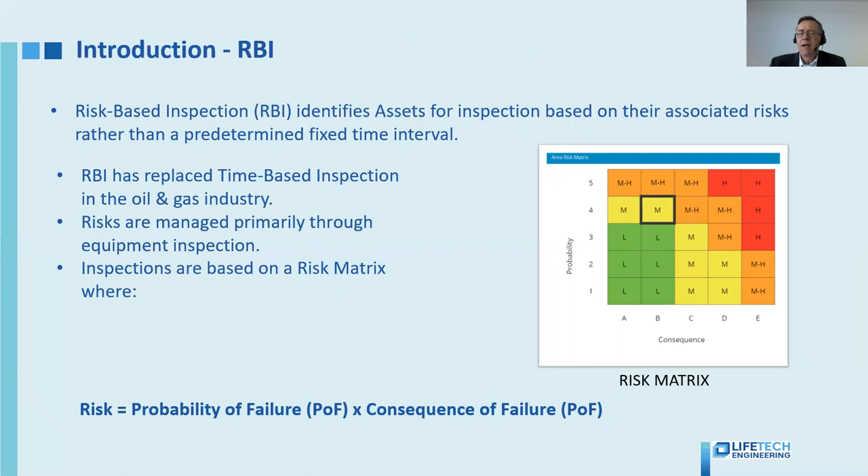Risk-based inspection identifies assets for inspection based on their associated risks rather than a predetermined inspection and maintenance interval. It's replaced time-based inspection in the oil and gas industry, and risks are managed primarily through inspection from a risk matrix, which gives a risk ranking for assets based on probability of failure and consequence of failure.

The UK HSE, the Health and Safety Executive Report, RR 509, described 4 stages of asset equipment life, and they all have their own characteristics and behaviour and have different management and inspection and maintenance strategies. The 4 stages are post-commissioning, risk-based maturity, deterministic, which is aging, and monitored, the final stage, the terminal stage.

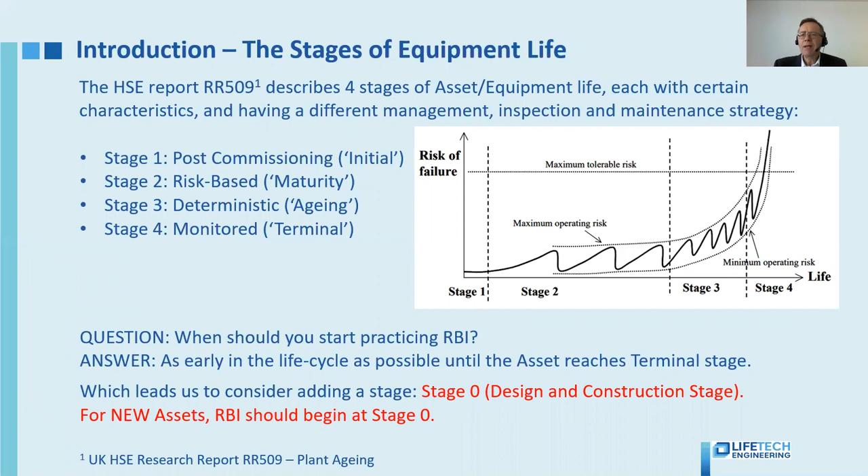And you would ask yourself, when should you start practicing RBI? Well, ideally as early as possible in the life cycle, and until you actually stop using the asset, until it reaches its terminal stage. So we would ask a question of, should you not consider stage 0, a stage before stage 1, and we're calling it the design and construction stage, and any new asset should start RBI at this stage. This is our opinion.

So what we have done on the stages of equipment life graph that you can see here is we've added a stage, a +1, which is stage 0. And this is the new project stage, where you should begin your RBI assessments at the design and construction stage, to get everything ready before you actually start operating. And then that's followed by the 4 stages I've already described: the post-commissioning, the risk-based maturity stage, then the aging stage, and the monitored, the terminal stage.

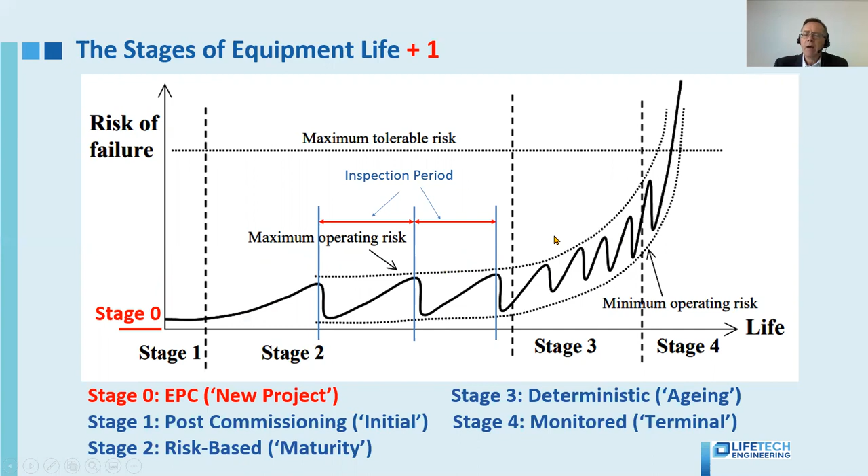And if you can see on the graph, when you're in stage 3, the periods between inspection become shorter as an asset ages. You can see the peaks on the sawtooth reducing because the RBI method is dictating that you should carry out inspections on a sooner and sooner basis because your assets need more attention.

Stage 0. If we consider stage 0, new project risk assessment, if you carry out an RBI assessment on new equipment while in the design stage, you can gain important information about how you're going to carry out RBI on an ongoing basis throughout your asset life cycle. It allows potential risks to be minimized and to have an RBI in place at the very start, at the very beginning of an asset's life. And you should follow the API 580 guidelines for this.

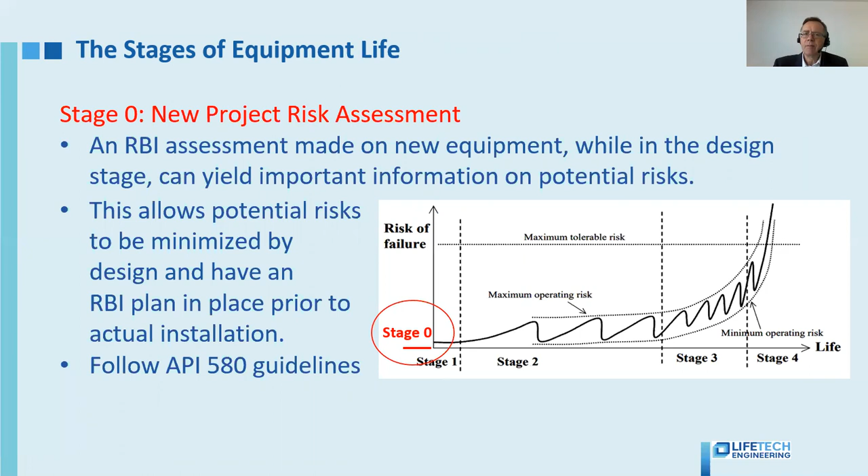Stage 1, the post-commissioning and early life stage. This is effectively a bedding in stage. You can see higher rates of damage accumulation and issues arising here because your equipment is actually settling into its operational life. And so your service conditions might reveal weaknesses or faults in design, or you might have fabricated some parts of it incorrectly.

For example, you might have a faulty welding procedure, or there might be some fabrication defects. And when it's bedding in, you might also find you've got installation stresses that you perhaps hadn't thought about, or you might have some mistakes in assembly. You might have some seals that don't fit, or some bolts fitted incorrectly. So stage 1 really is the early life, the bedding in stage.

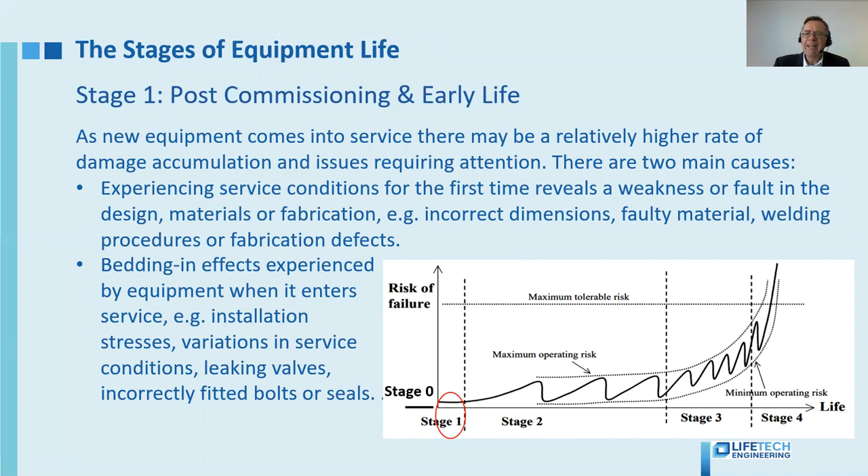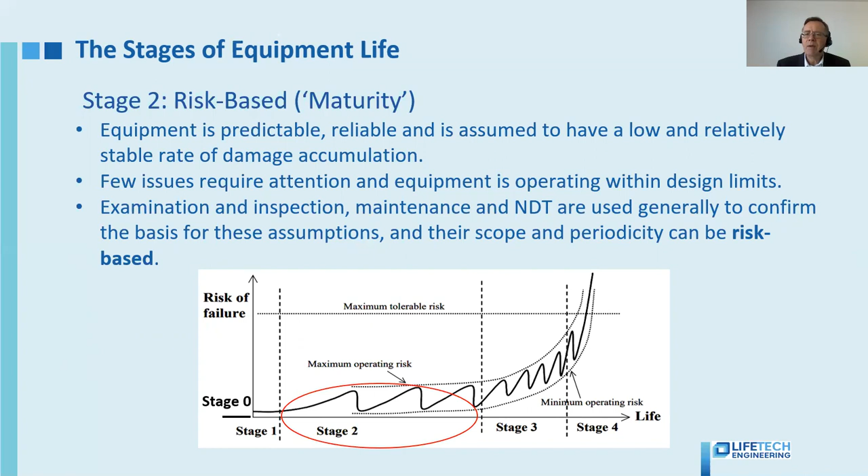Stage 2, risk-based, the maturity stage, is when your equipment is actually into its operational life. It's into its stride, and you should have low issue rate and stable rates of damage accumulation, because this is the actual good operational stage. You should experience few issues arising from equipment when it's operating within its design limits at this stage. Examinations, inspections, and non-destructive testing are usually performed to ensure that the equipment is actually operating as it should at this stage.

The aging stage is where your assets have been operating for a while, and you might expect some damage to accumulate, and there'll be a rate of degradation here. The equipment is older. It's showing some signs of damage and some signs of age. So it's important to determine the extent and rate of damage, and you might at this stage have to look at some fitness for service assessments.

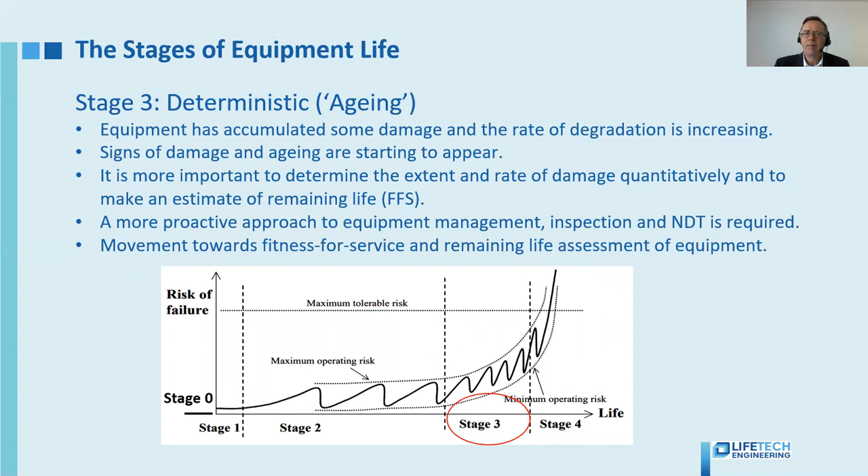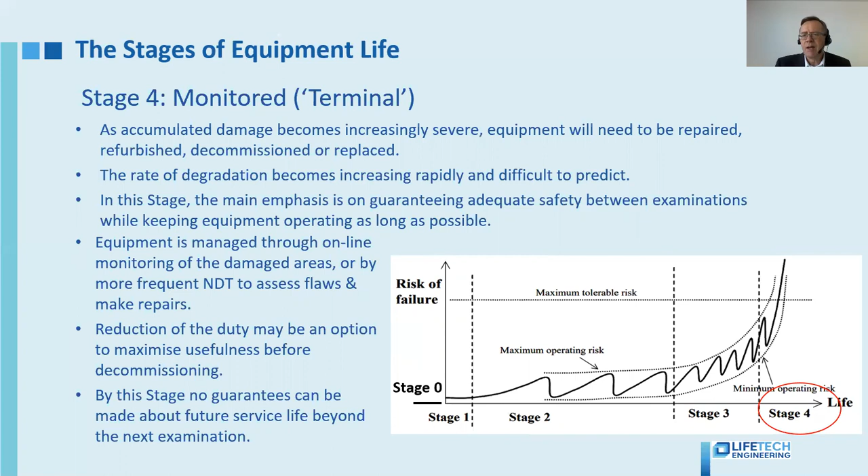Stage 4 is where it's ending. Your equipment is nearing the end of its life. Its accumulated damage is becoming increasingly severe, and equipment might need to be repaired, replaced, refurbished, or decommissioned. The rate of degradation is becoming increasingly more rapid. So the emphasis here is on maintaining your equipment safely and getting as much performance out of it as you can until it actually reaches the end of its life. At this stage, no guarantees can be made about the future service life beyond the next examination.

So to consider RBI at the end of life stage, it is useful, but the inspection efforts should really be focused directly on high risk areas where inspections will provide a reduction of risk for the remaining life of the plant. The high risk areas really only. Any areas that do not impact on risk for the remaining life, you shouldn't examine at this stage.

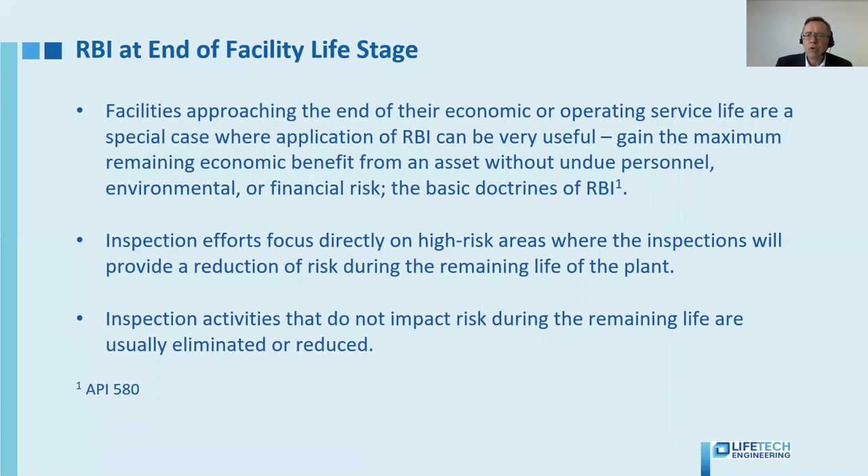So to summarize RBI at different stages of equipment life: stage 0, the design construction stage, assess equipment before it's installed. Look at any criticalities for the risk matrix for potential assessments. At stage 1, use RBI for the first inspection, following your operator standards and regulations to make sure that once it's commissioned, it's acting the way it should. And then stage 2 and stage 3 is where you have regular RBI, regular risk-based inspections through its real main core operational phase. And in stage 4, apply RBI at the end of life, but enhance it with fitness for service assessments.

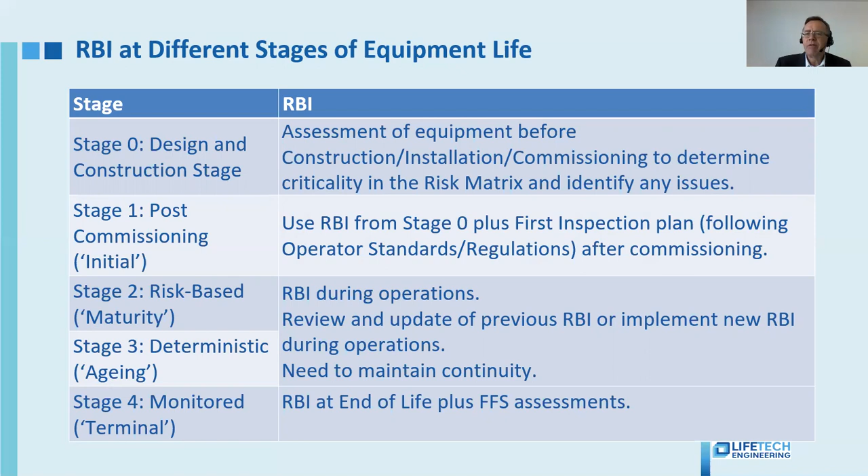So RBI for new projects versus RBI for established projects. For new projects, normally there's a time limitation here to apply RBI, because it's at the end of the EPC, it's at the end of the construction phase, and you have a restricted budget to look at RBI. You might have limited experience of RBI because you've got no data to work with. Most of the comments regarding RBI from the operator will come at the end of the construction phase, and so there's pressure to actually deliver the equipment into service.

Whereas for established projects, you have an established system which can be difficult to make changes with. There's customs and practices that have evolved over the life of the asset, and it can be difficult to move away from those. People can be busy with day-to-day operations. They'll have task overload perhaps. It's an additional task for plant engineers to address, and they have to integrate a lot of established procedures into the RBI system.

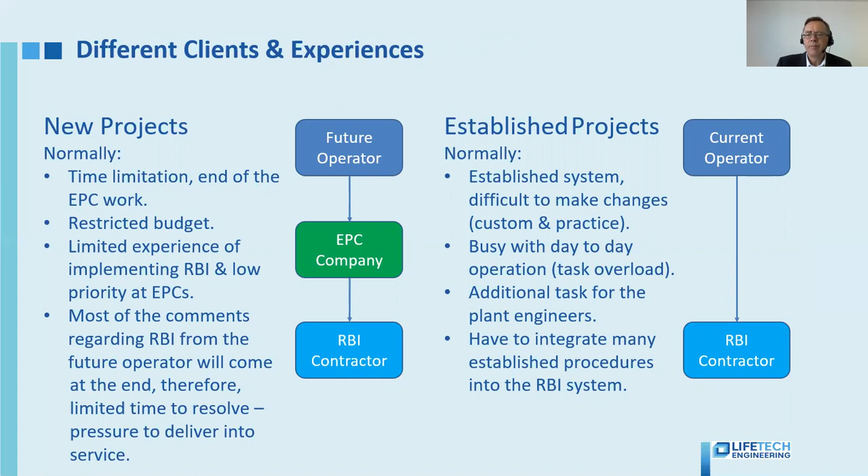Data quality and availability. For new projects, data should be readily available in electronic format. Drawings and data, however, can be updated during the RBI project. So you might have several different drawings to evaluate on an ongoing basis at the beginning. You might not have isometric drawings available, however, and you'll have no baseline data because you haven't commenced with RBI yet. So a lot of it is subjective.

With established projects, we found that you can have low quality drawings or missing drawings. You can have discrepancy between data from your line list, your P&IDs, and your inspection reports. A lot of the information will be in paper format. You may well not have everything in electronic format. So there's a degree of formalizing data before you can commence your RBI.

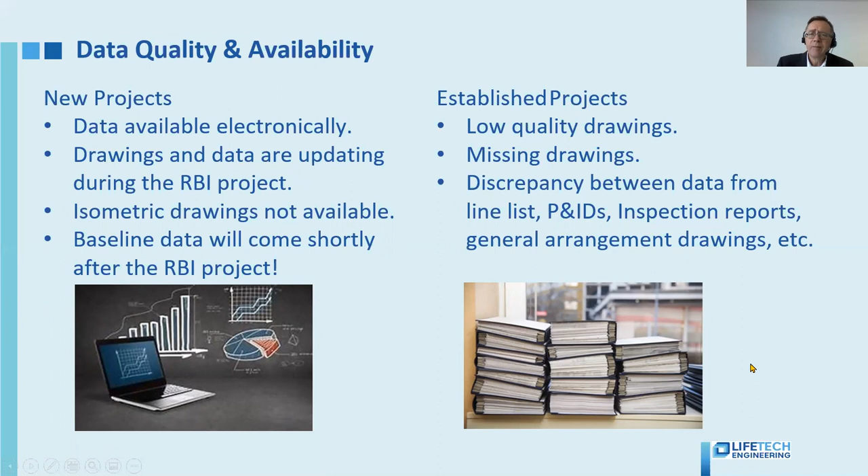Damage mechanism identification and degradation rates. For new projects, there's no real data available because you haven't started your first inspections. Therefore, you have to use theoretical models and make estimations on your corrosion rates. Theoretical models also have to be used to estimate cracking. However, it's essential to record all your assumptions made for future reference.

If you consider established projects, the client wants to address specific damage mechanisms. However, API 581 doesn't cover specific damage mechanisms. So you have to apply the principles in API 571 in addition. But you need to be aware that API 571 doesn't contain calculations for damage mechanisms. There will be different degradation rates and damage mechanisms present on different lines in a corrosion loop. So there's many aspects to consider for both new projects and established projects.

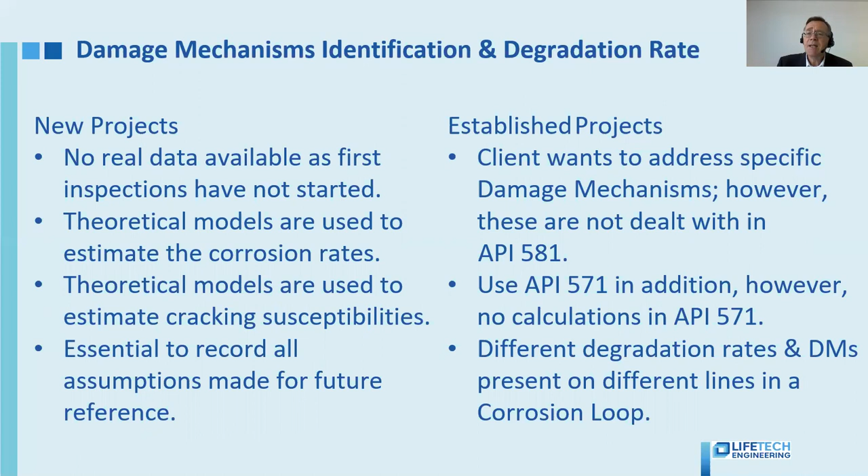Consider the risk matrix. For new projects, there might well be confusion between the project risk matrix, the risk matrix used when actually in the construction phase, and the RBI risk matrix for when you're actually looking at operational risk-based inspection. They're not the same.

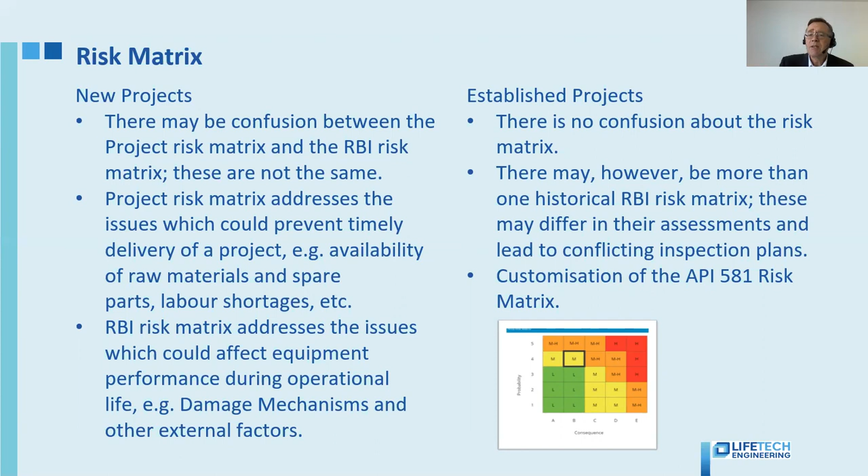For established projects, there is no confusion about the risk matrix. You know what it is, and you know what you're working to. It's a risk matrix for operational equipment assessment. However, there might be more than one risk-based inspection matrix because of historical occurrences. These can differ in their assessments and may lead to conflicting inspection plans. So you will probably have to customize a risk matrix to fit your established projects.

Inspection planning and first inspection. On new projects, you will need to combine RBI inspection plans with your first inspection, the normally time-based first inspection, and that can occur over a 2-year period. For established projects, it can be difficult to change historical inspection intervals built up from custom and practice over the years.

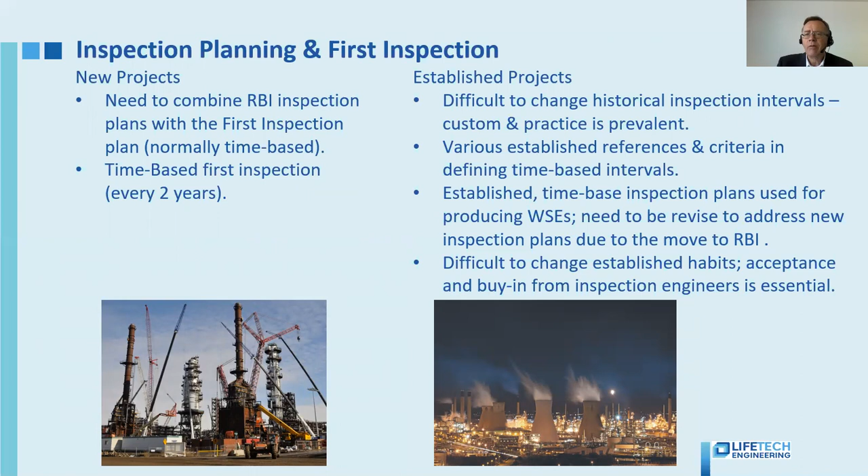Established time-based inspection plans used for written schemes of examination will need to be revised to address new inspection plans due to the move to risk-based inspection. It's always difficult to change established habits, so you really need to get the buy-in from senior management and all of the inspection engineers, the process engineers, everyone who's been involved in inspections and operation of the plant over time.

The RBI team. For a new project, corrosion engineers play a critical role because they need to identify, in their experience, the potential damage mechanisms that they might encounter and their potential effects, the corrosion rates on equipment. In contrast to this, the established projects rely on the inspection engineer, who plays a critical role in reviewing inspection histories and determining where to pay attention for future inspections.

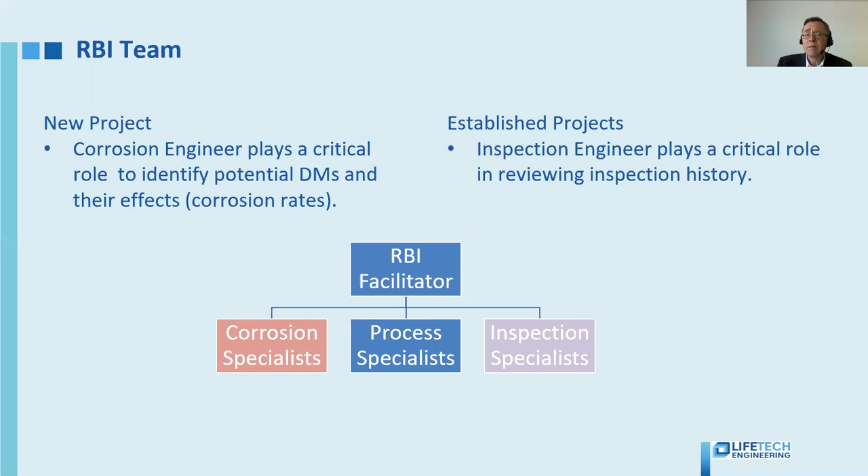Project durations. We find that for new projects, there are shorter projects due to readily available electronic format data, and you also haven't got any inspection reports generated because it's a new plant. It's a blank canvas. So data gathering can be easier and analysis can be easier, but there's a lot of subjective viewpoints here because it's a new plant.

Established projects can be longer because we find that there could be a lot of data unavailable. There might be a lack of data quality and inspection reports might be missing. So data gathering for the establishment of RBI on an established project can take longer.

Solutions. For a new project, we would recommend using a good RBI software with the ability to calculate theoretical degradation rates. Establish connections with future operators as well as the contractors to make sure that everyone has a rapport, that everyone knows the reasons for doing your RBI.

Consider time wasted for revision of any work due to new documents evolving. Once you've commenced assessment for RBI, there might be new drawings, there might be replacements of parts of the design. So you have to be careful that the current information you're using is the most up-to-date information that you will have, and that it's not liable to be replaced by alterations. Ensure that the first post-commissioning inspection requirements are considered in your RBI plans, and establish an experienced team, especially the corrosion engineer.

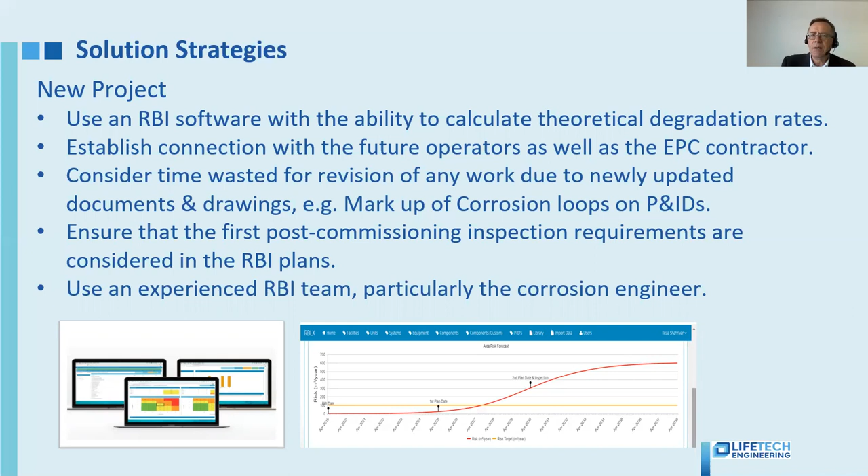Consider established projects. We have found that creating a joint team between contractor and client is the best way to go. Involve the inspectors, the corrosion engineers and process engineers from the start. Make data assumptions for low risk equipment to save time. Concentrate on the high risk areas.

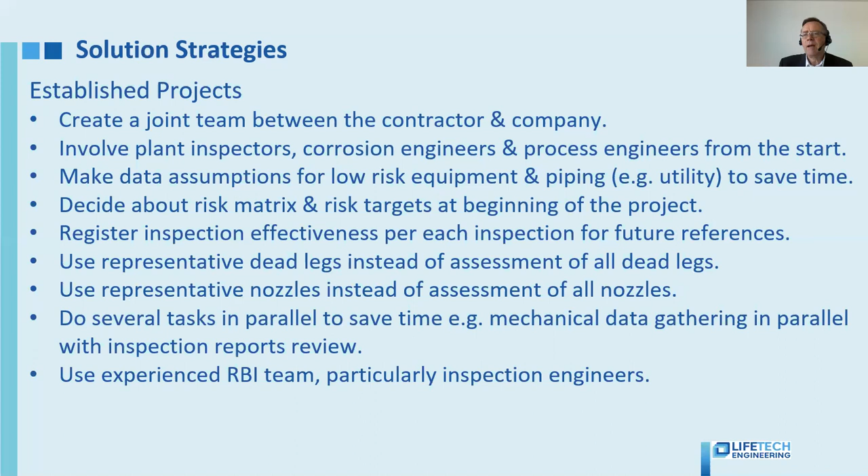What we have also found is that if you use representative dead legs instead of assessment of all dead legs, that saves time and concentrates efforts where it needs to be. The same goes for representative nozzles. Do as many tasks in parallel as you can to save time. And we can't stress enough the importance of using an experienced team, particularly, as I've said before, inspection engineers.

So if I can summarize, RBI can be done for all stages of equipment life. Ideally, RBI should be addressed at EPC stage, stage 0. However, there are challenges for all stages. Whatever application you do, have a robust strategy in place for every stage and define and agree clear scopes of work. Be realistic in your aims.

Consider all issues and challenges and have a competent software that you can rely upon. Have a competent team that you can rely upon. Have regular review meetings. Hold lessons learned. Just make sure that everyone's in agreement. And above all, present and discuss your RBI results with your technical authorities and management and agree a future program of work.